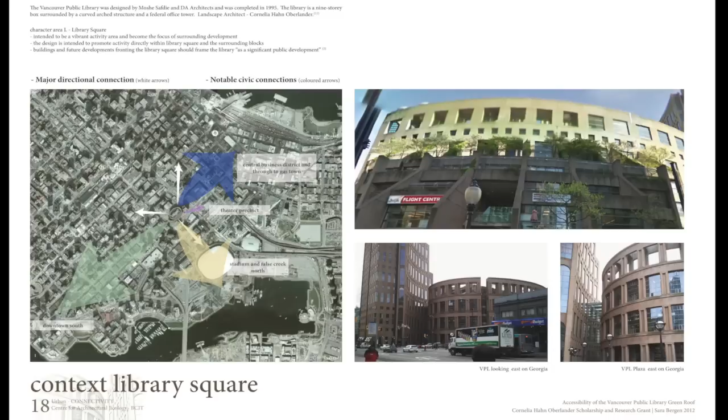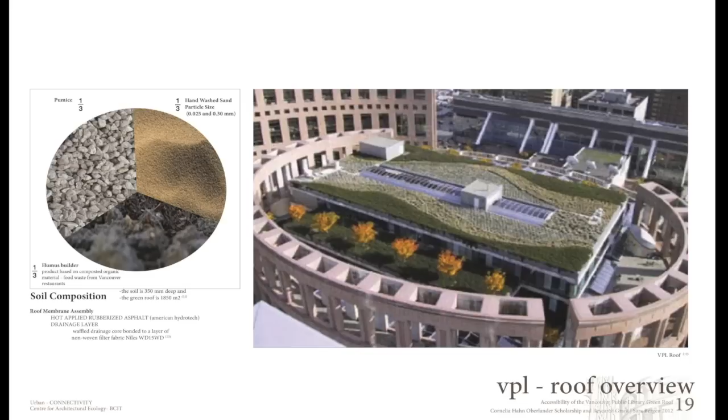What I want to do just to complete this context is show some images from a student of mine. These images were created by Sara Bergen as part of her scholarship project exploring the revitalization of Cornelia Oberlander's famous Vancouver Public Library roof. We're looking towards creating occupied space and habitat on that roof. So Sara explored the connectivity of this rooftop to other rooftops in the city. Sara investigated the experiential qualities of the roofscape, and the urban connectivity through our senses of sight, through touch, through hearing, and ultimately we're going to explore the physical connectivity.

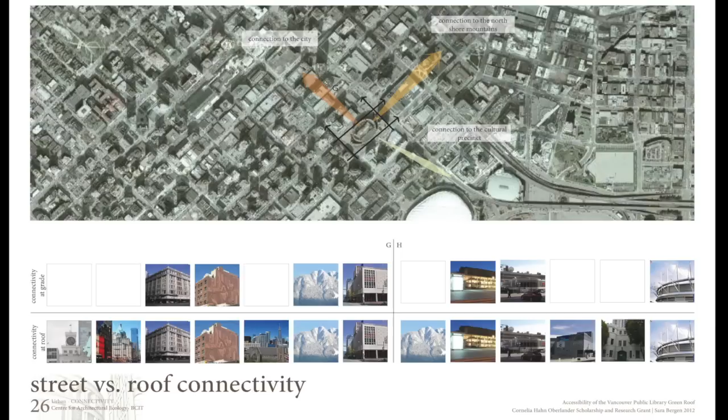It actually all started with a discussion on roof marks. This investigation you can see in the image here reflects rooftop connectivity, and you can see how much more of the city there is from the roof plane. The first row you're seeing are roof marks that you can see from grade in downtown Vancouver. The bottom row of images are the roof marks you can see from the same locations but elevated up on the roof.

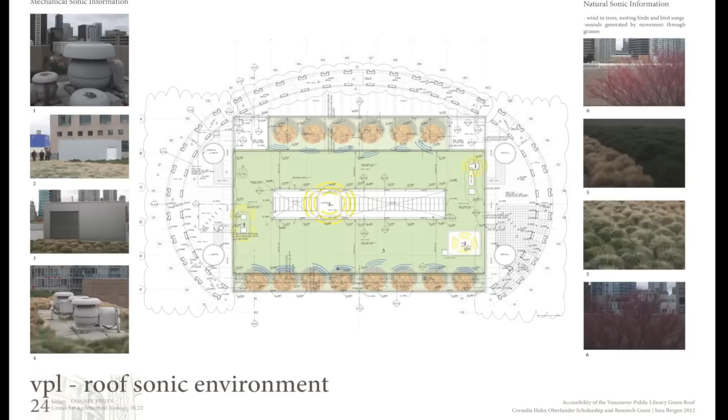That was the visual connectivity. In terms of the sonic connectivity, we began to explore the rooftop soundscape. So how is it different from grade level? There's the residual street traffic noise as it propagates and attenuates up over the edge of the roofs. There's mechanical system noise, but there's also natural sounds on the rooftops introduced by the plants and the inhabitants of the roof. We also uncovered sound marks that were drowned out in the traffic din. They reemerged once we were up on that roof.

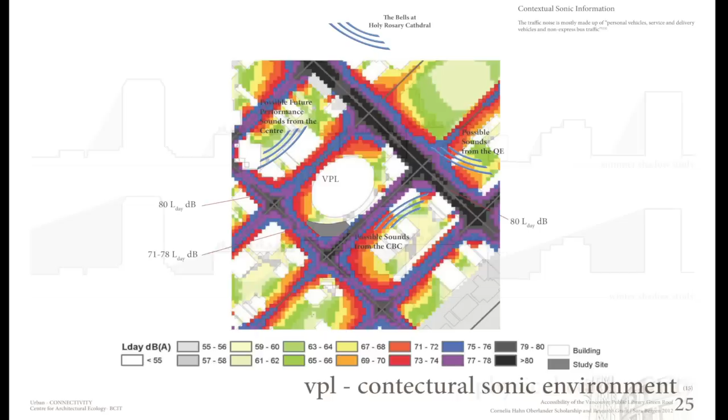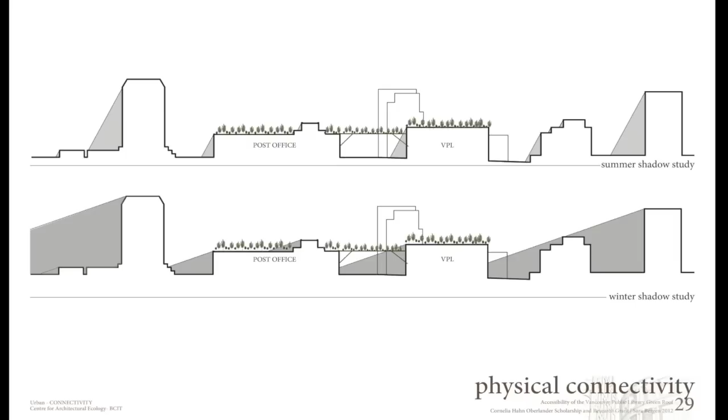When we look at physical connectivity, physical connection across the rooftops, we really needed to understand the building form, but we had to eliminate the grade discussion. So we have a quick image here of just the rooftops and how they might be connected by bridges through the city. Cornelia Oberlander specifically requested a discussion of a physical bridge from the library roof to the post office roof. The post office is a complete city block with a heliport and basketball, and it's just waiting to be introduced to the public realm as a sky park corridor. And this will be a focus of a new project.

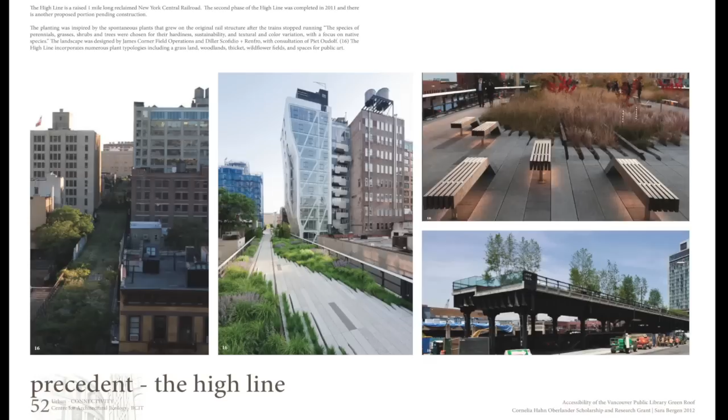So with pleasure, I pass the web over to Dr. Tan Puay Yok, you're there, and Puay Yok's in the city of Singapore. Thank you, Maureen. It's a great pleasure to join the panel for the discussion, and thanks again to Linda for organizing this as well.

Now, I have been involved, as you mentioned, in the urban greening and promotion of skyrise greening in Singapore for a number of years. And here I thought it would be useful for me to share my perspectives on just two areas. First, why Singapore wanted to push for high-rise greening in the environment. And secondly, what are the outcomes that we are enjoying now in terms of success in pushing for high-rise greening. Right, so firstly on the motivating factors, I think the primary motivating factor for pushing for more greening in the high-rise environment is really for Singapore to cope with urbanization and increasing population density.

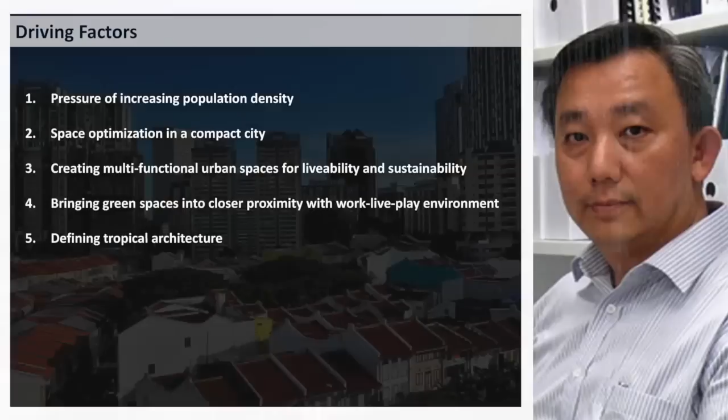Now, Singapore, as most people are aware, is very small, and it's also a very dense city. On a city basis, its population density is perhaps even comparable with that of Hong Kong. But unlike Hong Kong, Singapore is also a country. So as a country, it has to set aside land for areas such as water catchment, military land uses, even agriculture, which would normally not be required for a city. So as a country, it faces, I think, even more severe land constraints compared to a typical city.

So really here with increasing population density, the pressure that we're experiencing for the last couple of years or even the last decade is to set aside adequate green spaces. And these are required, as acknowledged by many people, for enhancing livability and sustainability of the built environment. So really here, we are talking about this as a primary motivating factor for pushing for high-rise greening. If the ground level space is more or less saturated, then the only option that we have now is to push our green into the elevated plane.

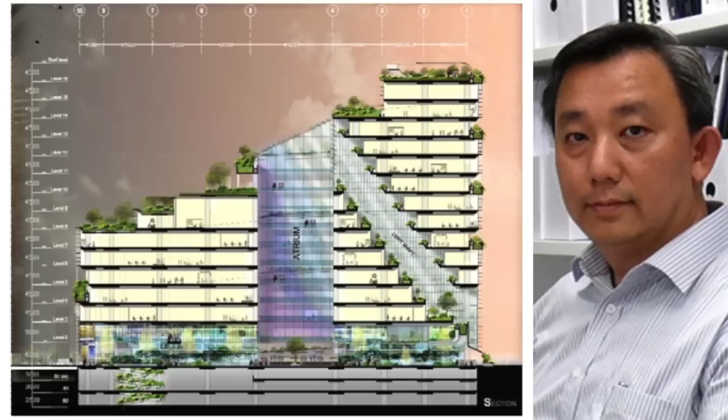And this took the form of what is known here as sky-rise greening. And the active promotion efforts really started perhaps in the late 1990s to early 2000. Of course, it's not to say that there weren't any rooftop gardens before that, but these were few and far between.

And what we're talking about is an active promotion effort to push for more high-rise greening throughout the public space as well as private spaces. Now, that's the first motivating factor.

Now, the second motivating factor is really that we are all aware, it has been shown by scientific evidence that with increasing urbanization and loss of green spaces, there are severe changes in the biophysical environment of the city. And we are looking forward to use green spaces to counter some of these negative effects.

And there were quite a number of studies, and some of these are still in progress in Singapore, to show how we could actively include green spaces and use the greenery to mitigate negative effects of urbanization phenomenon, such as the urban heat island effect, stormwater drainage systems, meaning slowing down stormwater discharge into our drainage systems, improving water quality in our water catchment, even using green spaces to conserve and enhance the biodiversity of Singapore.

And last but not least is to foster the mental well-being of Singaporeans through exposure and visual relief that green spaces bring about. Right, so these are, in my view, two main clusters of factors why Singapore has actively put in efforts to push for high-rise greening in the urban environment.

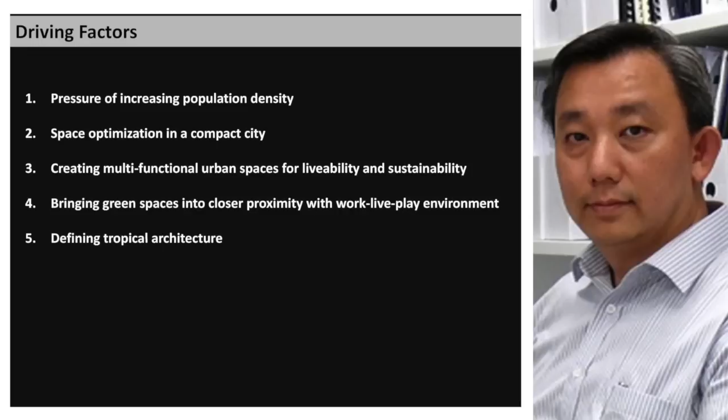And in the academic language, I guess this is saying that we are using green spaces to deliver ecosystem services for Singapore. Now, this has been going on for the last decade or more, and I think it's fair to say that there has been good progress through the kind of efforts that have been put in, and we do now see elevated green spaces in different kinds of spaces in the city, and I'll tend to classify them into three major types of spaces. These are public spaces, semi-public spaces, and private spaces.

Now, in the public spaces, by far, I think the most important public spaces relevant to high-rise greening is really the public housing estate of Singapore. Singaporeans live in high-rise apartments; the majority of Singaporeans, about 85%, live in high-rise public housing. You'll see some examples of this in the slides that I've prepared.

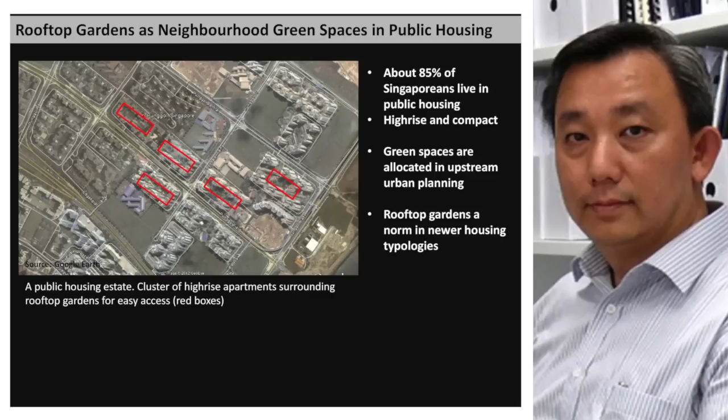And over here in the public housing, rooftop gardens, which are constructed typically above multi-story car parks, have become a design norm in the last decade or so. And the primary effect here is that we do see a rooftop garden above a multi-story car park that is in close proximity to the residents, and this in effect brings green into close proximity for easy access by the residents.

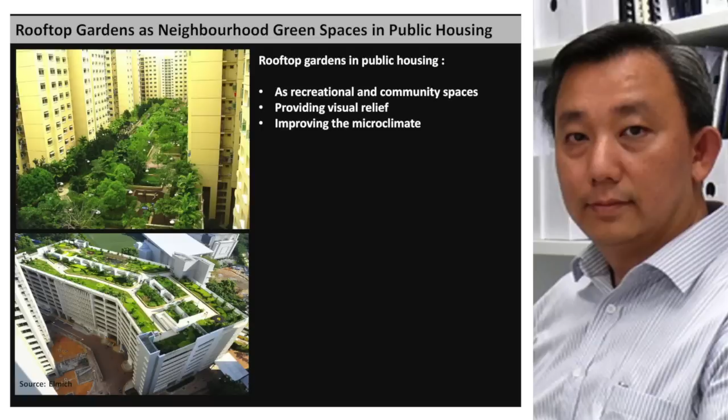Now, the second category of space are what I call semi-public spaces. These are in fact public infrastructures, but they have certain operating hours, and therefore they are closed to public at certain hours. And I think there are good examples of semi-public spaces now in Singapore that have embraced the concept of having rooftop gardens or sky-rise gardens that in actual fact is creating multifunctional uses in the land that we have.

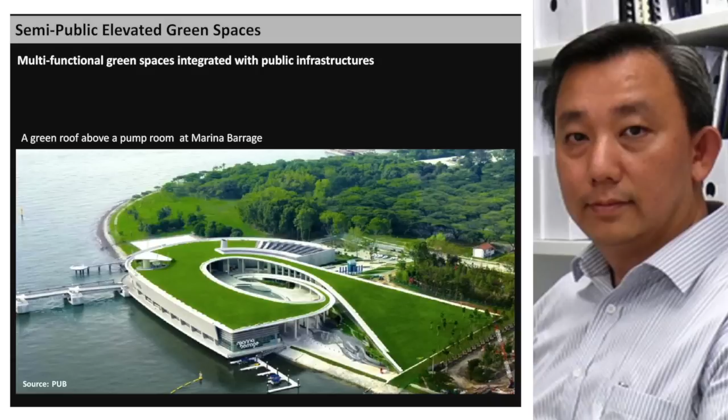So for instance, one good example here is the green roof above the pump room of the Marina Barrage. And again, there's a slide in the presentation that I used to illustrate. Now, it was interesting to note here that originally the building was conceived to be just a utilitarian pump room that engineers will simply design. But it was decided that instead of just a pump room with normal rooftop that's concrete and waterproof, there should be a green roof that should be constructed. Decision was made to invest in it, and I think that has been a fantastic decision.

Not only has it enhanced the look and feel of the place now, as you can see from the image, it has also become a very heavily used space for picnics and kite flying, with a very fantastic view of the Singapore skyline. And there are also other examples of such buildings in Singapore, such as the National Library, as well as the Khoo Teck Puat Hospital that has been presented earlier in other conferences.

And the third kind of space that I'd like to talk about are private spaces. And I think this is where we're also beginning to see an increasing trend of using green to create distinctive architecture, or if you may, tropical architecture in Singapore. And I think that the private spaces are perhaps one of the early adopters of skyrise greening in Singapore. But over the years, we are beginning to see bolder and, in fact, more overseas architects displaying their creativity in the buildings they are designing in Singapore.

So for instance, you do see a building by Daniel Libeskind, The Reflections, that promote or incorporate the use of rooftop or sky bridges to create recreational spaces for residents. OMA has also recently created a building which is almost nearing completion now, called the Interlace, that displays rooftop gardens as spaces for residents to use.

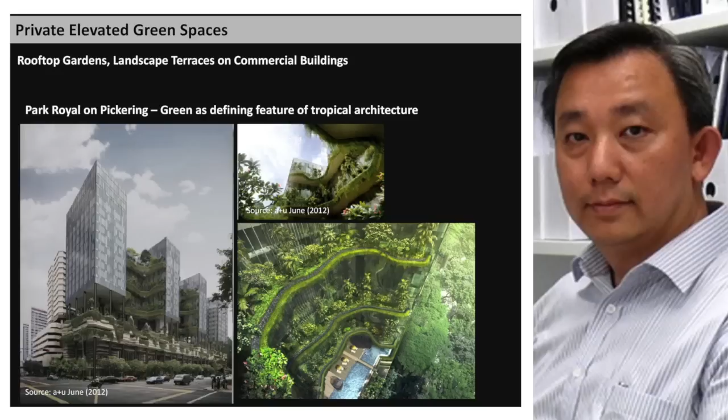So I think with the kind of efforts that are put in by different design professionals, and typically you involve the collaboration between the landscape architects and architects, we are going to see greater innovation and more wonderful creations in the city of Singapore. Thanks.

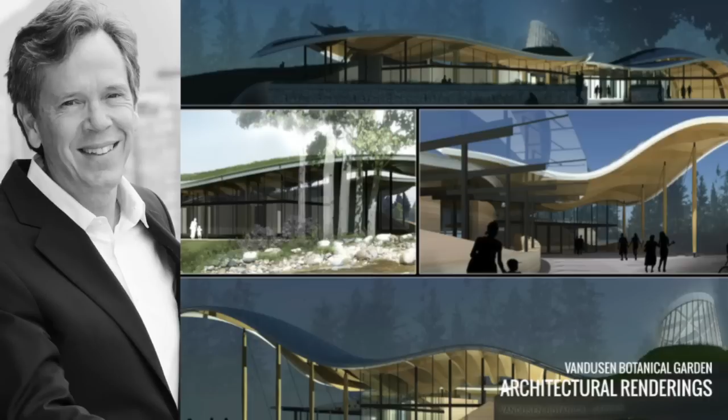Our work has been very, very diverse, and we've been greening structures, well, 35 years in my practice, probably 50 years in Vancouver, since zoning in the late 60s, early 70s mandated most of parking to be underground, covered with rooftop gardens. The first project I'm going to show is a civic project. It's the VanDusen Botanical Garden, and it's an outstanding place where we combined architecture, landscape, ecology, and art. It's truly an inspirational project,

developing a truly organic form of building meant to be visible from the street. It's a landmark building, wood first, and it features lightweight construction, sloping green roofs. And I'm going through the slides. It's part of net zero energy and net zero water. Water is collected on the roof. There's multiple energy systems. There's treatment as well. Construction was done over the course of 12 months, and it is beautifully vegetated. I'm just moving through the slides.

Broadway Tech Centre is a 4-block neighborhood in East Vancouver. It's built largely on top of the Eaton's Warehouse complex, so it's a brownfield site. It also features, I believe, the only City of Vancouver street that's entirely built over roof deck, over the former warehouse, which is converted to parking. The whole street is modular. Broadway Tech is truly an example of green economy, both the companies who have located there, as well as a number of jobs created. The buildings are LEED Gold certified.

There are major urban connections to SkyTrain from the neighborhood, so it's a great example of urban connectivity, rooftop gardens, intensive gardens, and water gardens on the ground plane. And then up on the top of the roofs, we feature sedum mats, only 2 inches in depth, 12 pounds of weight per square foot saturated, ultra lightweight, and constantly changing throughout the year. A big driver in Vancouver: Vancouver is very well known for its high-rise residential developments, again, built on multiple rooftops and creating places for amenity.